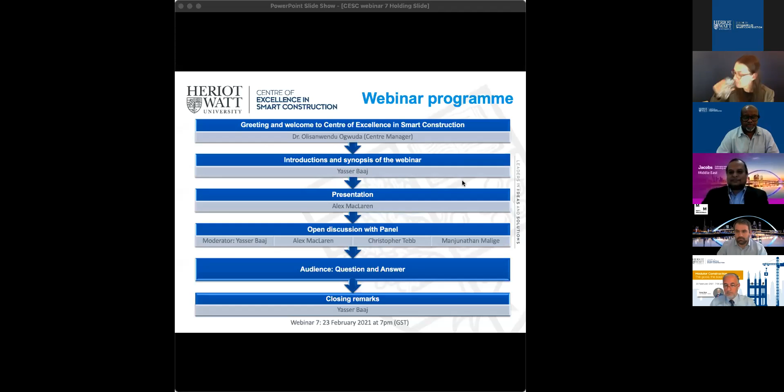The Center of Excellence in Smart Construction is committed to advancing industry-led innovations in the built environment that will revolutionize the way we develop, manage, and operate smarter cities. We partner with like-minded organizations and government entities to lead the transformation of the built environment and development of next-generation professionals for the benefit of the economy.

The Center is a global hub for disruptive thinking, a platform for collaborative research, and a model for solutions development and stakeholder engagement. The Center's industry-led research and development has a focus on enabling technologies around three main research themes: performance and productivity, sustainability, and well-being. The collaboration is intended to provide leadership in the future direction of the industry that will inform policy decision makers.

We would like to acknowledge our four partners who have been integral to the development of the Center and their engagement with industry. And I'm pleased to say that representatives from our partners are on the panel at today's webinar. It's now my pleasure to introduce our esteemed industry and academic experts.

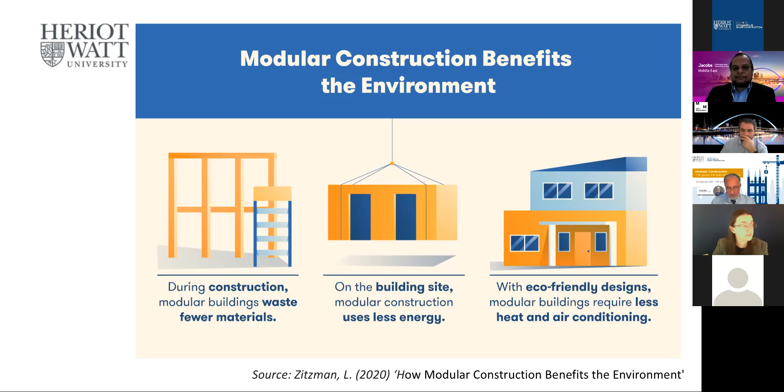So as Yasser said, modular construction has been around in some form for years, if we consider it as part of a legacy, which includes off-site manufacture all the way from, as you said, casting bricks. But we require a lot of investment, and this way of building requires our support. And when I say our support, I mean everyone hopefully listening to this webinar, across developers and clients and designers and contractors, because this needs a lot of investment.

Now, my argument, and you'll see from our case study, is that this needs to fundamentally change the way that we think about designing and constructing buildings, and that we need to embrace that as a whole industry in order to develop this modular construction.

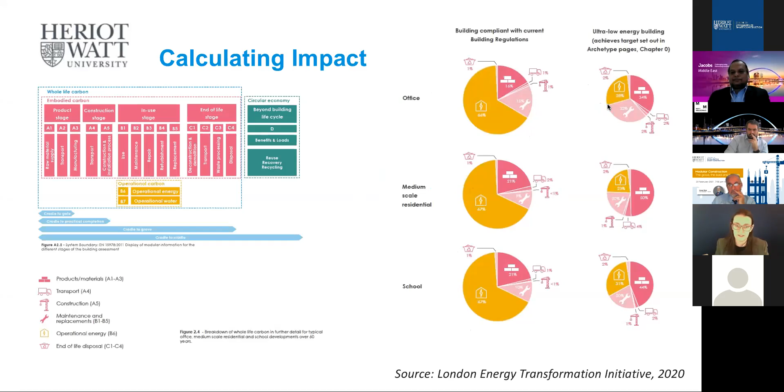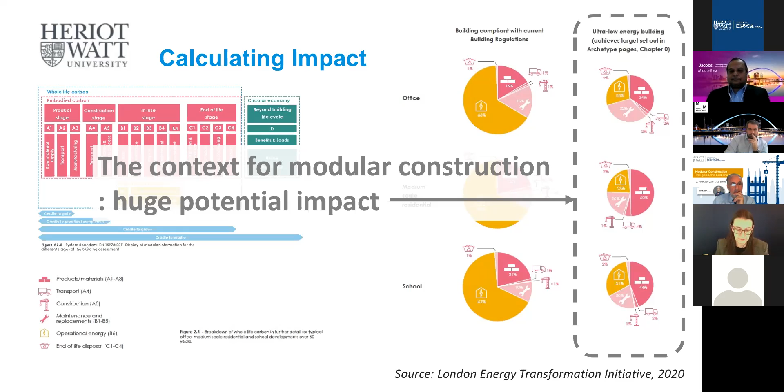And there that operational energy and the carbon impacts of that are massively reduced because we're managing to green our utilities supplies. And actually what we have here is a situation where the embodied energy, embodied carbon, and the impacts of maintenance and of construction on site in terms of the overall energy of a building are massive. And so for us to be able to embrace modular construction and decrease those will have a huge, huge impact on the future construction industry and the efficiency of that.

So as an example here, looking at embodied energy, and again, thanks to the LETI report for this graphic, we see that we can actually affect all parts of this cycle of calculating embodied energy by embracing modular construction. We can reduce the amount of transport required to take different pieces to different manufacturing plants because we're working in one place. And because we're looking at repetition, we can decrease the wastage. We only have a more limited amount of transport to site because we're transporting modules rather than individual components. And that construction process is much reduced in time.

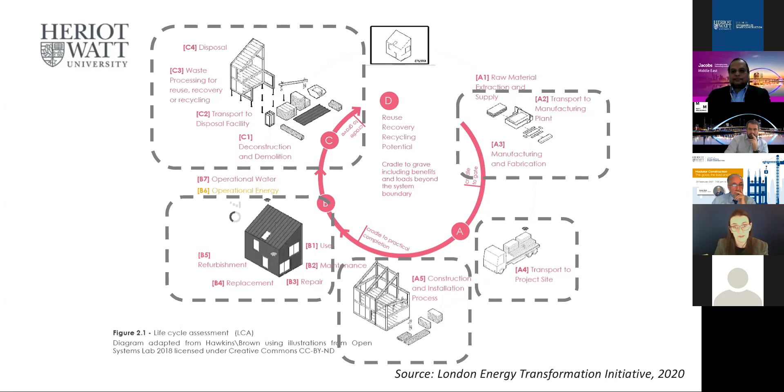We have an ability to potentially replace and maintain buildings much more efficiently because we have this repetition and this modularity. And then we can also think about taking buildings apart and effectively remodeling and reusing them and recycling the components. So modular construction to me is key to all aspects of addressing the climate emergency.

We are using modern methods of construction, MMC, and this is part, as Yasser said, of a history of off-site manufacture. A newer term, a newer acronym which you'll come across is Design for Manufacture and Assembly, DFMA. And I think this for me is a core one because it's where designers and consultants are beginning to understand that we need to change the way we design in order to effectively embrace modular construction.

And then there's the definition itself of modular. When we say modular construction, do we mean panels? Do we mean a volumetric module? Do we mean pods, or are we talking about complete units? In the case of houses, complete rooms, or even complete houses. And all of these are part and parcel of what we're discussing in the webinar today.

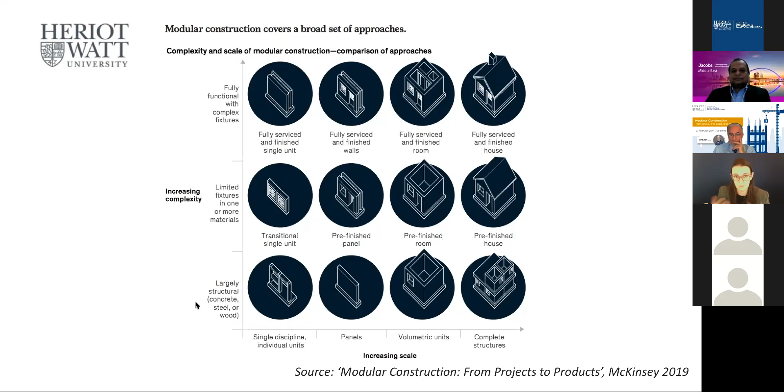And one of the big advantages, environmentally, yes, but also to all of us in terms of the efficiency of our society and of construction, is the amount of time that can be saved. If we are looking at volumetric modules on site, this report would argue that we can actually begin to deliver projects at 50% potentially of the time that we would in traditional construction.

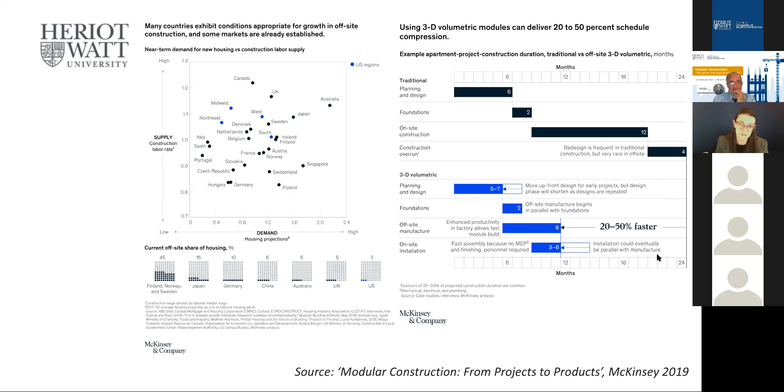And all of these different breakdowns have a significant impact on what is available to you as a designer or contractor on any one site that you are working for. So there is no one answer to navigate the landscape that I've just set out in front of you. It's very much based on the context that you have.

A very short case study example then to illustrate exactly what I've just said. I'd like to show you a few drawings from Team ESTEEM. This is the Heriot-Watt Solar Decathlon team, led by a wonderful bunch of students who are exploring this massively exciting, innovative and complex project by working together across campuses through a pandemic to design an innovative solar powered house. And here we are before the pandemic when we could all sit together and enjoy that.

A core part of that house is an understanding of the structure and how it can be put together. And because this will be part of World Expo, we have a really, really tight timescale for actually assembling this house on site. It's going to be 2 weeks from a tabula rasa, a flat ground, up until the house being occupied. And this requires us, of course, to look at modular construction.

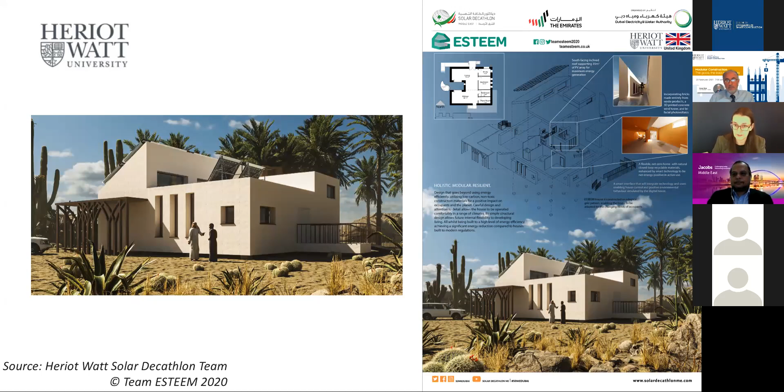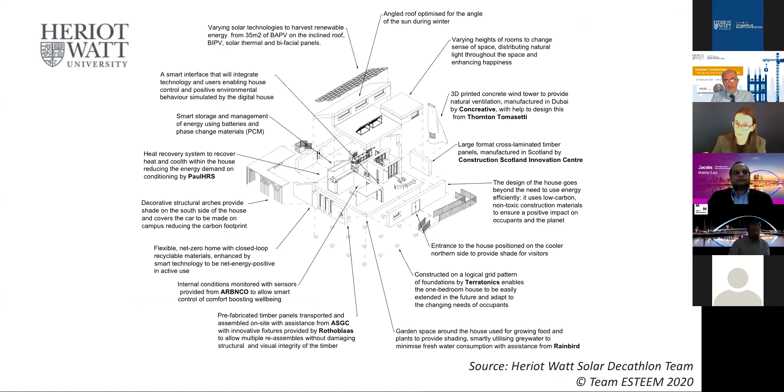Now, having investigated this and what is available, what the students have come up with is a hybrid of a panelized construction with some work on site and then elements of pod construction within that. And this is just to illustrate some of the technical difficulties which can come up when you begin to investigate the implications of working in modular construction.

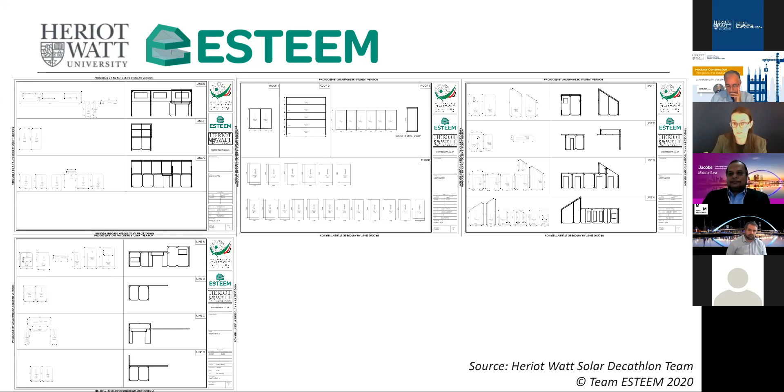But this gives you a bit of an insight into the hundreds of drawings which have to be put together prior to manufacture on site in a factory of these panels. And these drawings include the services runs, these drawings include the way that the structure is going to be fitted together. They also include additional structural connections for lifting pieces by cranes, because you have this kind of temporary moment where you need to be putting something together on site with a very different structural requirement.

And all of this then needs to be understood in terms of how these are going to be put into different shipped containers, the order that they're going to be taken out of, and there's a huge logistics challenge around this. That's where we get our efficiencies, but it also means there's a lot more challenge for the designers, and it's a type of challenge that I would argue many designers are not prepared for, they're not ready for.

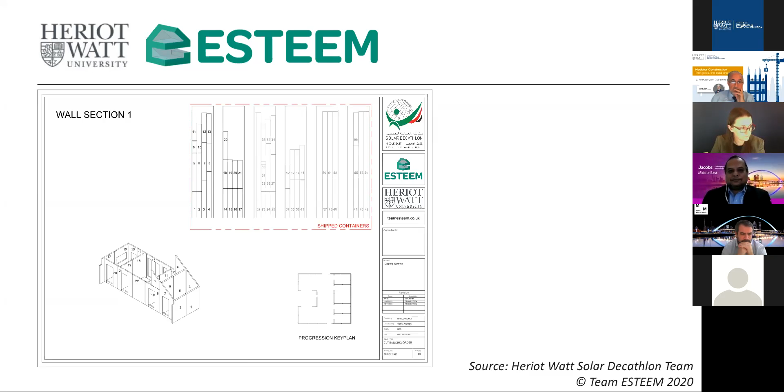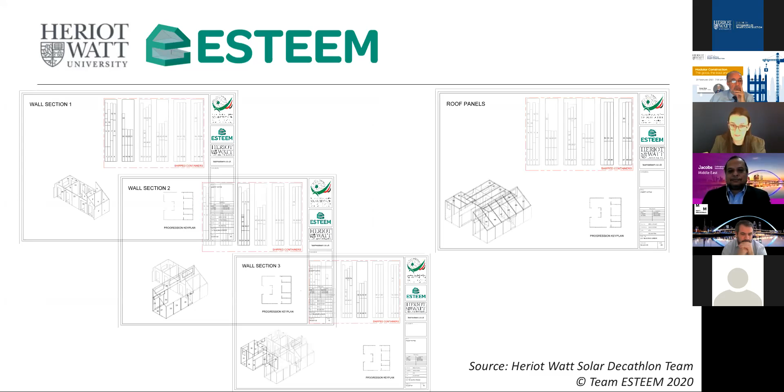What the students have worked together to do is to provide a logistics plan which allows us to mostly assemble panels with a few pods as well on site in this 2-week window. And that's the most efficient system that we have come up with. Now, it's only enabled because we have access to a factory like this.

And this is the Construction Scotland Innovation Centre Innovation Factory in Hamilton, not that far from our Heriot-Watt University Edinburgh campus. And this is an example of the CLT, that is cross-laminated timber panels, which will be making the house. And they're about 100 mil thick, but after they come out like this, they're going to be laid down on this factory floor, lifted by these cranes and cut to exactly the right size.

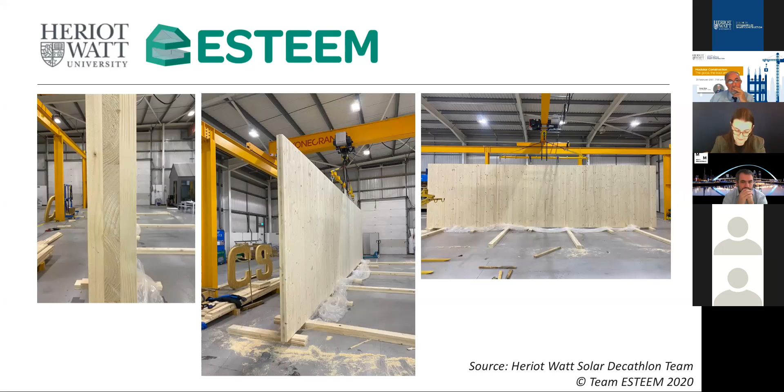And then they can be fitted with the doors, the windows, and the insulation and the other elements of construction. And these are the facilities which are required to enable us to effectively make modular panelized buildings in order to then work with this in our project. So these are some of the lessons that we've learned. Having those facilities are absolutely crucial.

And as you saw from the brief map shown earlier from the Centre for Digital Built Britain, there are not a lot of these facilities around in the UK at the moment. And I think that's a significant stumbling block for a number of countries. It's really, really important to front load the design, technical design.

And I'd be really interested to hear from my other panelists here and their experiences of that, because in my experience, industry is not significantly prepared for that element of front loading, and perhaps clients are not significantly prepared for investing in that element of technical design prior to seeing anything actually appearing on site.

It's important to understand how these are going to fit together, but making prototypes, which is how you need to understand that, is only effective if you do have a repetition in your design. And in terms of thinking about the good, the bad, and the ugly, I wonder if this is why some modular construction has a bad rep, because people see repetition and a lack of bespoke features as something which could be perceived to be ugly. I think we need to change our perception of that really, really significantly.

And then finally, I will argue that design for manufacture and assembly is fundamentally different from designing for traditional construction. And the way that my student team have had to be working together across disciplines, thinking about integration, working with BIM and clash detection, it is fundamentally different to the way that I have been used to working in industry prior to this.

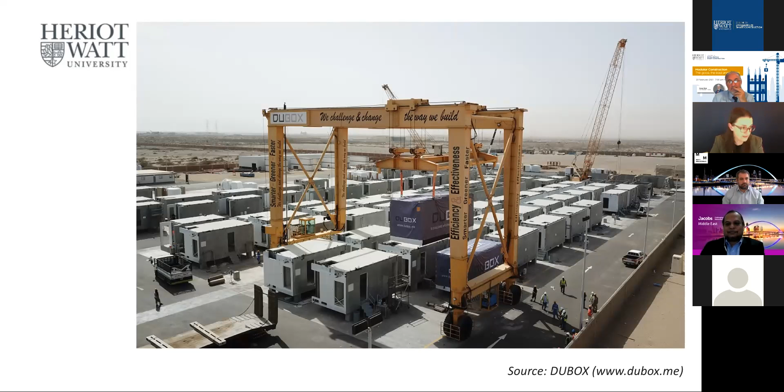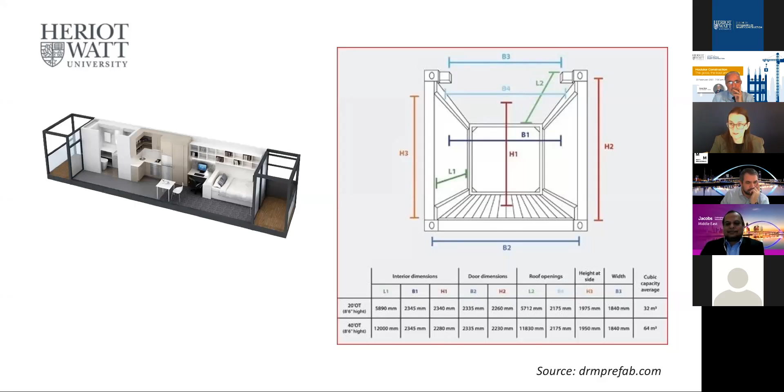And so I would argue that we do need to embrace the modular, but we possibly don't need to embrace the idea of a 2.2 meter ceiling. There are so many examples of places where this can be really, really valuable, but I don't think we want to repeat the mistakes of the past, as it were.

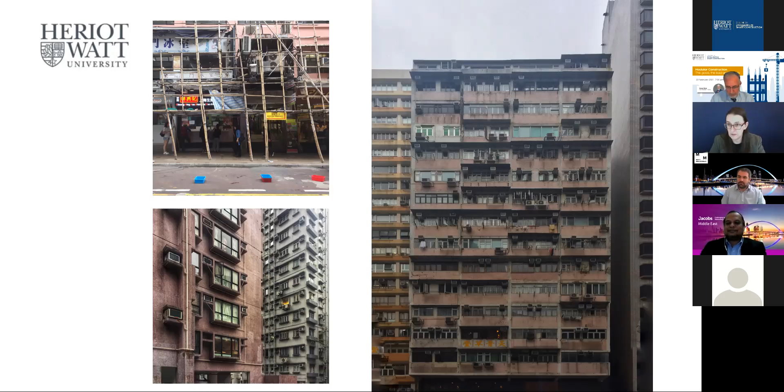And these are a few photographs from Hong Kong. I was amused by the bamboo scaffolding, so I included it. But you see here the idea of repetition, of modularity. In this case, though, in a very, very old traditional style and really inefficient means of construction. This is surely what we can improve upon in terms of meeting the climate emergency and also improving the way that we live.

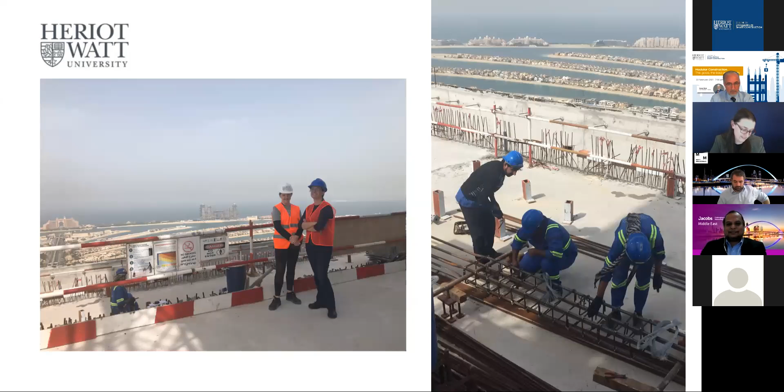And then finally, an example from Dubai and a visit I had there a couple of years ago, looking over Jumeirah. And I think to finish here, what this tells me is that you can see in the right-hand image that we can have repetition and we can have really significantly beautiful urban spaces at the same time. And I think it is the responsibility of the construction industry to start to embrace modular construction and the overhaul of our perceptions of what it is to construct that entails.

So my conclusions then: investment is key. Where that comes from and how we enable that is perhaps something we can now discuss. I would like optimization and enhancement and efficiency to be seen as more desirable than bespoke designs, because I think that has to be the way to go to meet the climate emergency. I'm excited to talk about the applications beyond buildings, and I raise that because, of course, as an architect, my preface here has been mainly buildings based, but Manju, I'm keen to hear about infrastructure as well.

And I return to the idea that it isn't just an interest in efficiency or cost or even in digital transition which is driving this. This is a climate mandate. This is the way that the construction industry can actually become sustainable and can allow us to meet the climate emergency. So I will leave us there and hand over to hopefully some industry questions and also some views from my other panel members.

Thank you very much, Jessa. Thank you, Alex, for such an interesting subject.

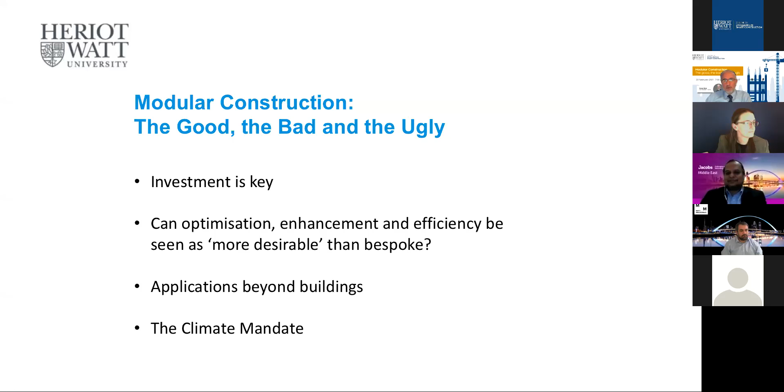And I'm glad that somebody is talking about modular construction as ugly, because in some corners it is ugly, although I'm one of those who are very well connected to modular construction. But yes, in some corners it is ugly. And I agree 100% with you that it is our responsibility as industry stakeholders and industry experts to handle such ugliness and eliminate it and make beautiful buildings out of modular construction.

However, I have a question for you to trigger the panel: how do you see modular construction in the sustainability world? Do you see it as the right answer for it? And here we are not addressing only PPVC, we are addressing everything related to sustainability. Especially, there is a good question here from an anonymous attendee: is it sustainable and feasible to have CLT buildings in a climate like that of Dubai? Which has a point.

This is a question back to me. Understanding embodied carbon involves understanding how the materials arrive at site, and Dubai doesn't have a lot of trees. So I would have to start by saying that importing timber to Dubai has its own questions all around it anyway. Our purpose for the Decathlon Middle East Expo is to showcase excellence from around the world, because it's part of World Expo.